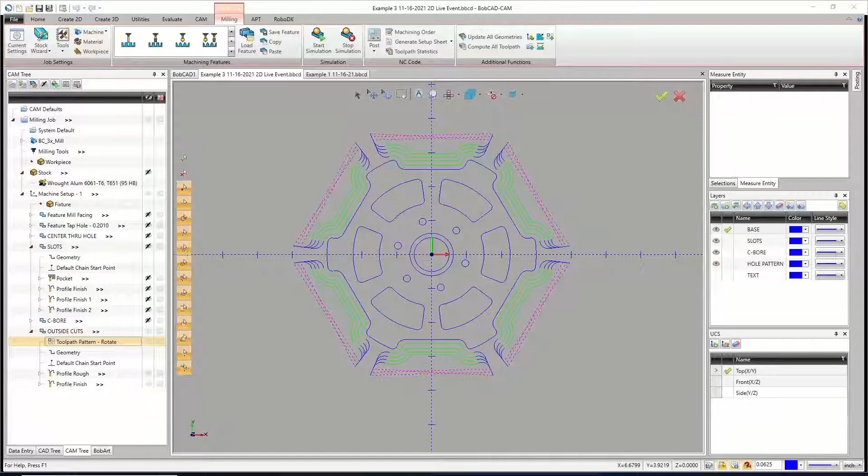Yes, perfect. All right, so right here is your part file. Now, I just want to show you my part file, and I want to point out one thing. When I have my stock on and I look at my origin, mine's top dead center. Yours is right over here, so that's what you'll see. Your machine setup is right there, which is totally fine.

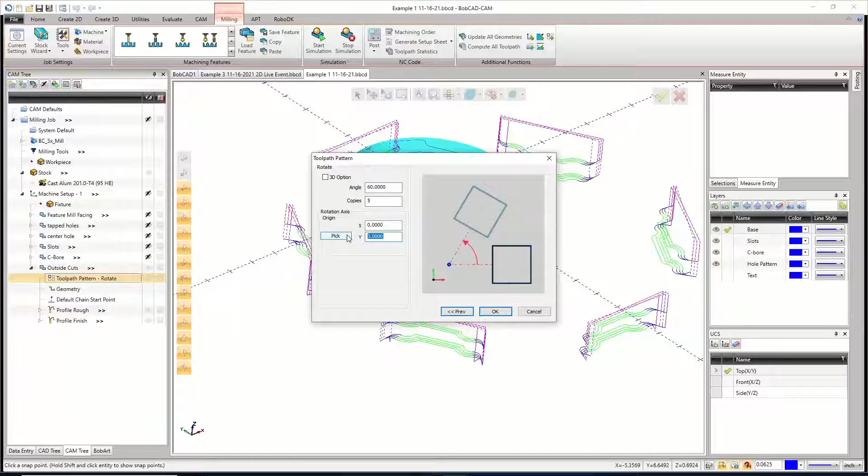The adjustment we have to make is on the toolpath pattern. When we're on here, mine is going off the origin of the part, and the origin for my part is the center of the part, so it's XYZ0. Yours, what we're going to do is just hover over this arc in the middle, then pick that center point. What you'll see is the difference: you have a Y that shifts your rotation center point up 3 inches to the center of the part. Then if I hit OK, it fixes it all. So that was the only difference, and that's totally fine.

That might be where you set your origin up. If that's not where you wanted to set your origin up, you'd have to go right-click on Machine Setup 1 and say Edit, and then pick this top dead center point here. Now, I'm going to do this. If you meant to do it, that's great. If not, we'll fix it here.

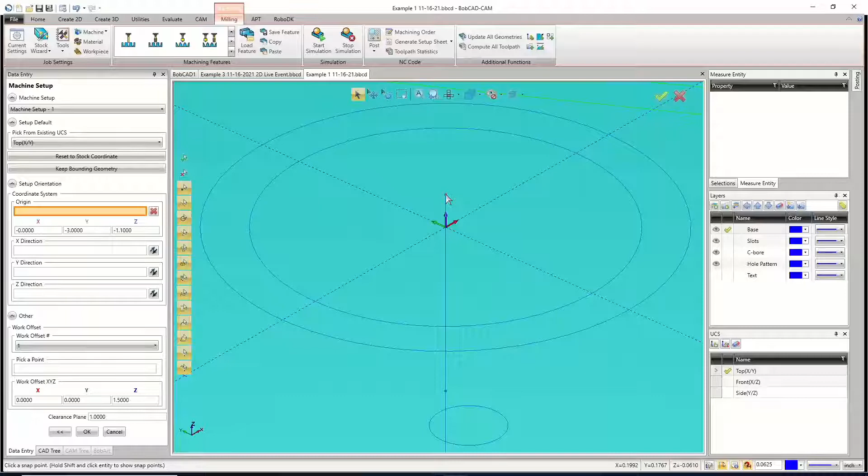Now, for everyone else who's seeing this, think of this as if you accidentally put your origin in the wrong place when you started and then you made all your tool paths, which happens. I've done it a bunch of times. Or it's one of those things you're thinking, I'm going to use the bottom left corner, and then when you get it set up on the machine, you realize it's easier to find a different corner, or whatever.

So if I move this, right now all of the toolpath that's in the part is in accordance to where the original origin was. So now that we've moved it, you'll see the toolpaths moved along with it. So what we have to do is right click on milling job and then do update all geometries. Then we're going to right click on milling job again and hit compute, and it should just recalculate all those bits of code.

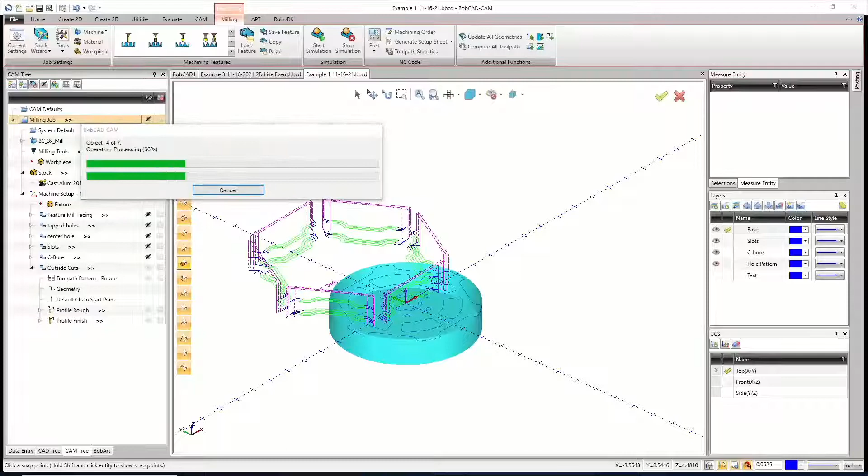And now, because we have our toolpath pattern, the toolpath pattern now has to relearn the position, or we just have to reset it. Right now, what's happening is it's rotating about a center point right out here, and from our one toolpath, it's just basically spinning around itself. So we just have to edit that toolpath pattern and just say pick.

Once again, just pick the center of your geometry. You don't have to worry about Z because it's the center of the geometry, it's for X and Y. So now I can hit OK, and that's going to set it up.

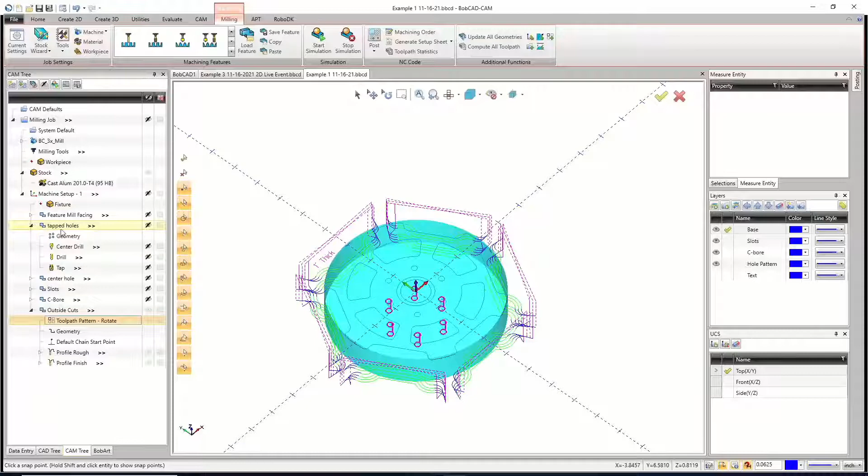Now, the next thing I always would say, if you do make this mistake, go in and check the holes afterwards. Open up, especially your tapped ones, open up your feature, because it likes to do this shift of the top of the part. And we went with Brock's copy — he had his origin on the bottom of the part, which is common if you're doing this on like a spoil board, where you'd be setting your part down and either vacuuming it down or clamping it down somehow, screwing it down, whatever. You'd go off the spoil board and then your heights are up from there.

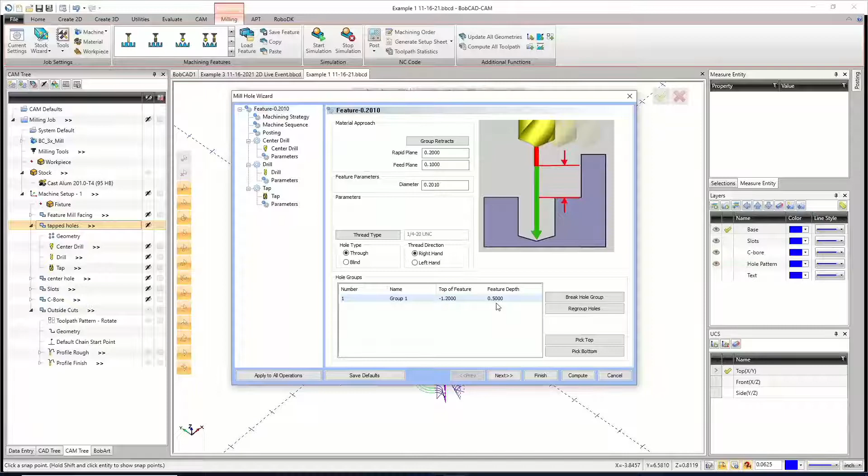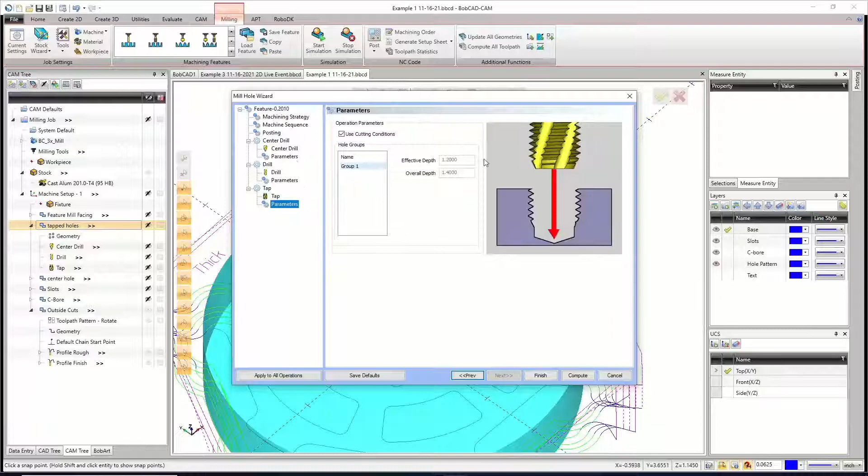So we'd have to go in and say, well, the top, we'd say pick top — and this always does this. Then pick just any edge that represents the top, and then right here we have to reset that depth, so we'll go 1.2, just like that. Then when you go back and look, your parameters should update for your drills and everything like that.

So now I can compute that. That's really the only one you'll have to worry about the depths on, and a lot of it comes from the fact that we're using wireframe geometry to define our holes. If we had a solid model and picked the inner surfaces of the solid model holes, then when we say reselect geometry, it reads the diameter and the depth from that, so the odds of it not making a mistake doing it that way are better.

But you'll always have to double check the holes, just because especially when the origin changes Z positions, it can act kind of weird. So there we go.

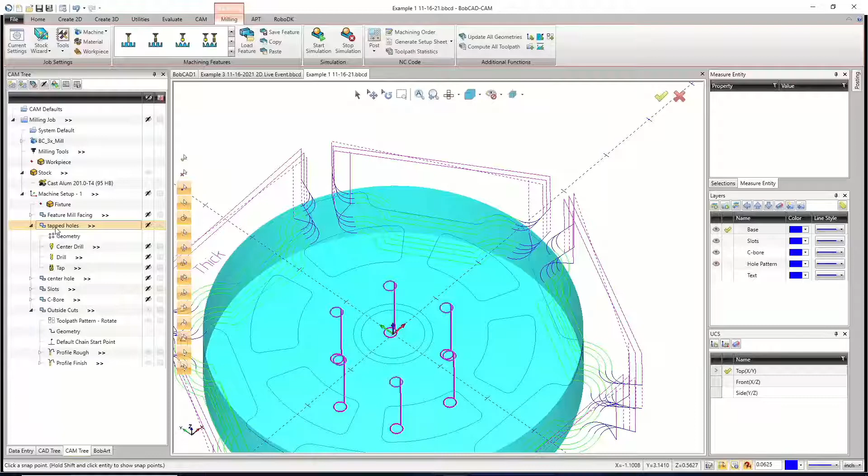All right, Brock, did you get all that? It was your origin was in a different spot. That's all it was. All right.

Awesome, all right, so Brock's got that. Now let me get rid of this. Just got to clean up the chat so I can see which one I'm on.

Sent you the file. Got it. All right, so got it.

So John, you asked, can you explain how to look at the views top, bottom, and apply dimensions to them? Yes, we could totally talk about that.

So let me grab this right here. All right, so I have my stock turned on. Let me hide all that stuff. Hide that. There we go.

So the top view is this view right here, it's just when you click this button. Now this is the top view of the top UCS. And the UCS is really what we're talking about if we were to try and dimension in different views. I'll show you an example of that.

So the top view dimensioning is really just whatever kind of dimensions you want to put on your part. I would usually do it - I mean, you're going to use the evaluate tab. And ever since they added this auto command, that's pretty much what I use.

So with dimensioning in a top view, which is your standard view, the difference is going to be: if I'm in a top view, I'm dimensioning the top, a top UCS. If I was to go to a front UCS, that's looking at the part from a front view. So we're going to go right here and view front.

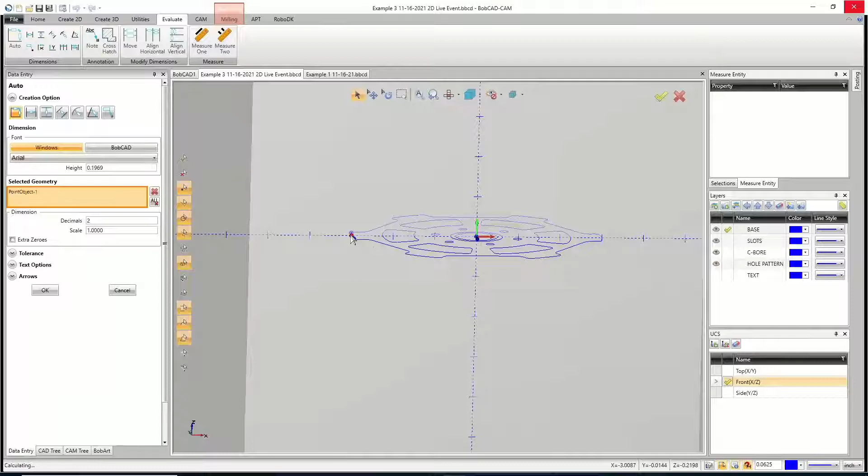So the front view is going to allow you to measure the diameter of our part from here over to here, and it's going to tell me that it's 6 inches. All right, now I'll hit OK and cancel.

And then I'll go back to a top view. So you'd be able to take your measurements based on whatever UCS you're in. So basically the UCS just rotates where you're drawing. For dimensioning, it just rotates where you're dimensioning.

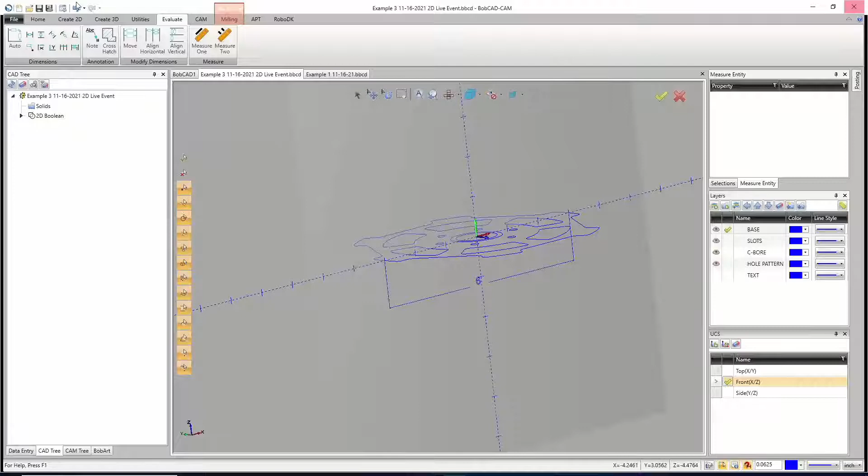In a part like this, you'd never dimension with that dimension. You dimension everything from the top plane. Basically you just want to align your X and Y axis with your part and then lay down dimensions.

For something like this, I would - a lot of this is arcs, so I can pick this arc out here, and it'll tell me what the radius is. So I could do that.

If I want to get the diameter, I could pick - let me clear out the geometry. If I wanted to get the diameter of that, I'd pick across those 2 points and get my diameter.

Any arcs, you just have to click on the arc, and it'll give you the radius from the center point to that arc. If you want it to show the diameter, you really would have to measure across it like I did with the 6 right there.

But fillets, you just click on the fillet. Again, I'm under just the auto dimension here. You just click on the fillet right there. You can see there's a decimal section - you could go out as many places as you want.

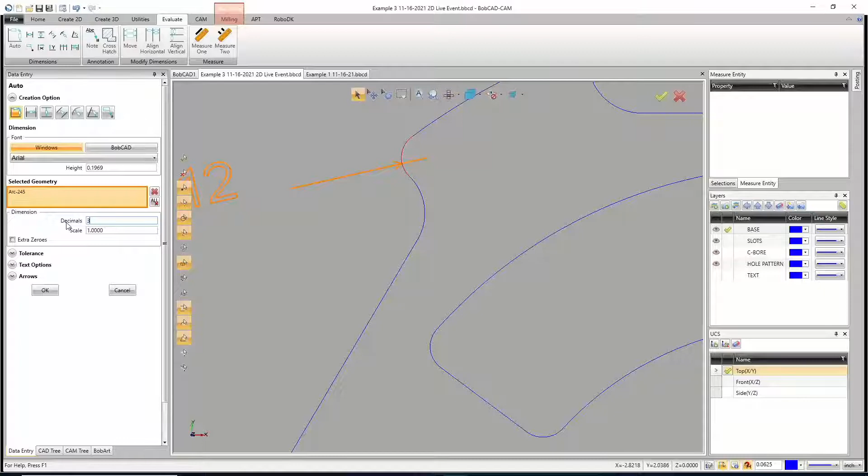For something like this, it's an 1/8 inch, so I would at least go 3 decimal places on there and then lay it down.

For holes, you just pick the hole and it will define the diameter of the hole. I'll go right there with that.

Same thing with holes - I don't really have any lines on here. Oh, I do - here, if you want to measure like a line, you could just click the full line and then drag it whichever direction you want to take the measurement for. So lines do have some play with them that you can do.

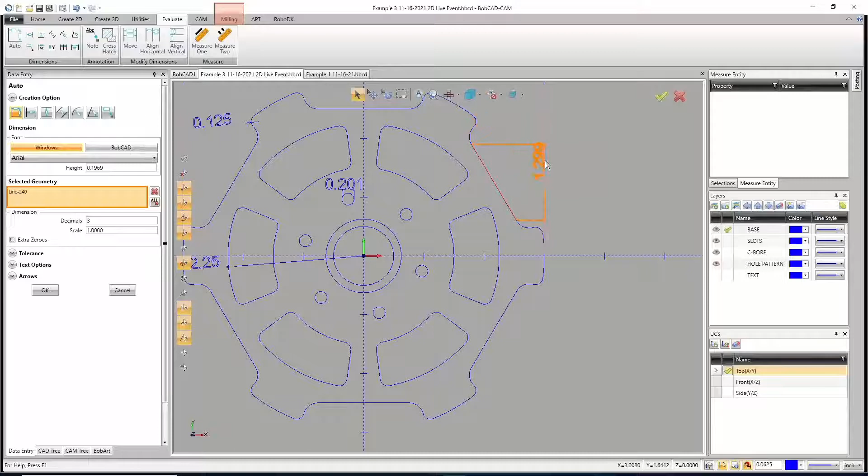You could even dimension points. So you're just really laying down dimensions.

BobCAD is not my first choice in making dimensions and doing like a print.

It's possible, but you really have to, like with SolidWorks, to make a drawing - you bring your solid model in, and then you take your solid model and you say, I want to make a drawing out of this, and it brings in the views.

You just say, I want a top, front, side, whatever, and it kind of does it automatically. For BobCAD, you'd have to draw that all out. The way I would do it would be with a solid model - I would copy and paste that solid model. I'd have to rotate it, and it's a bit more work. It's definitely doable, but it can be a lot of work.

So, did that answer your question, John? I could go maybe a little deeper. I just need to know where you want to be. All right, well, he's answering that.

So David sent me an email. He's got some parts he's working on. He doesn't have BobArt, which is unfortunate - it's a fun little program to use. And the parts are for a radiator grill spar from a 1934 Cadillac. I like it. All right, so I saved some pictures of it. Let me open these up.

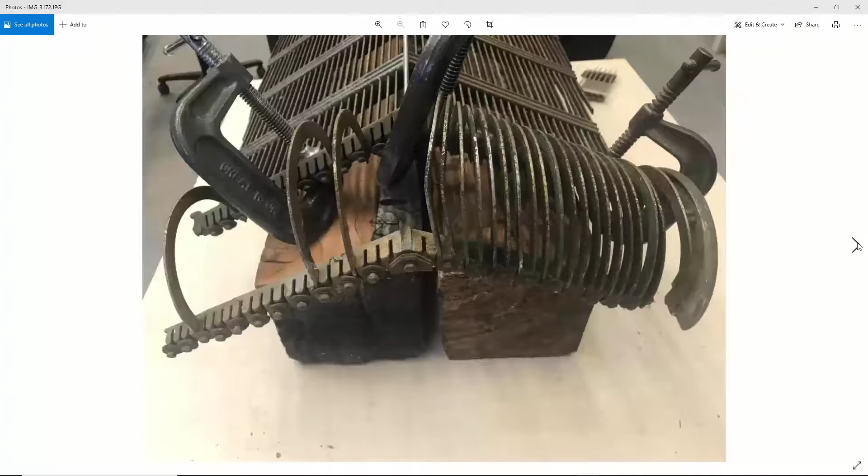Oh, here's the other pictures. You guys can see what it goes on. How do you go to the next picture? There we go, that's what it goes on. So they are all the same size, and so they're the ones down there. Okay, yeah, I mean, any of those ways would work. But...

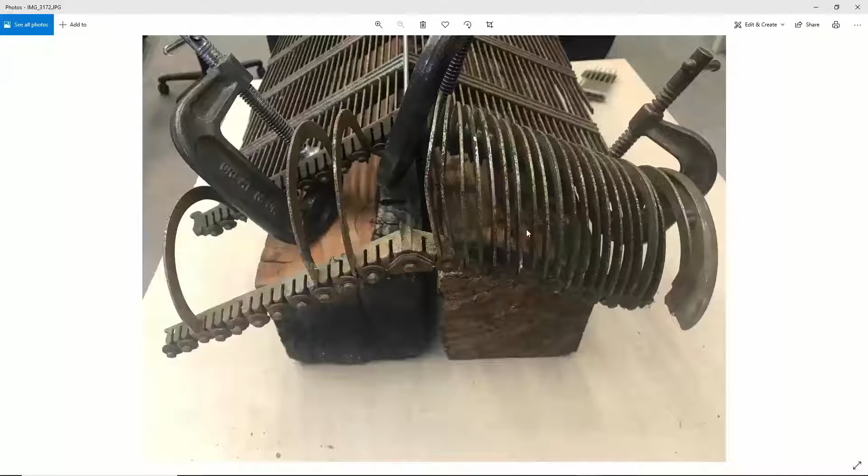Yeah, I mean, if we want to try it just to see if the BobArt idea would work - can you adjust the spline to adjust? Adjusting splines is, I think it's possible, but it's not super easy.

Let's see, so we'll make a smooth curve, as smooth as I'm getting right now. All right, so there it is, there's my spline. Now adjusting splines is a bit difficult because normally what you'd adjust with would be like the deform - or really the deform is what you'd get. I don't know, yeah, I guess you can adjust it, it just depends on where you click on it, and it affects kind of all the points around it, so it's not just affecting one point. It would affect kind of all the points around it. But yeah, you could definitely drag it and move things, so it's definitely something you could do.

You know, I would almost look at putting two of them together, because if there's two of them together and you could get a full oval, you could just do an ellipse. Like if two of those put together made an ellipse, you would measure the X, you'd measure the Y, and all you'd have to do is punch those in.

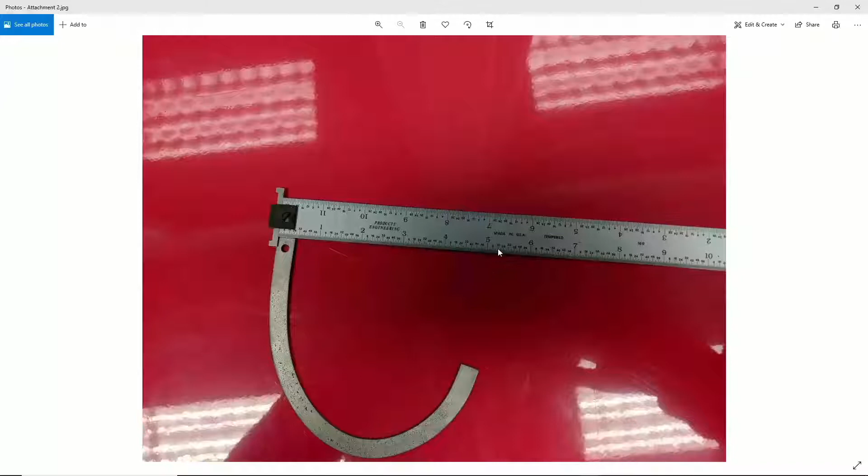So looking at the picture again, let me open this up. Looking at that, if that was to come around and keep sweeping, let's call it 5 and 16/64 ish - what's that break down to? 5 1/4. All right, so we'll go 5 1/4 on the - well, that would be our minor axis, so 5.25.

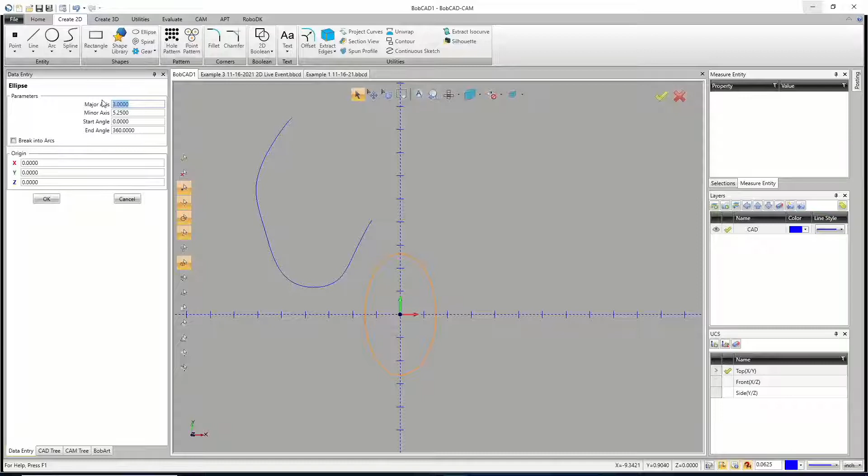And so that would be the minor, and then the major would be almost - yeah, if it looks like an oval, I would take a measurement of it straight across. Now, he said he did put the two together and it looks like an oval. I would do two straight across right now. If it's 10 inches or whatever, that would be kind of your oval right there. And that might work decently well.

And then from there, you could either break it into arcs, or when you create an ellipse, you create a spline. So, I mean, you'd have to figure out your break point, where you want to cut it. But other than that, you'd be able to go in and do your deform and modify it as needed.

Cool, yeah, that's probably how they made it. They probably made oval pieces and then cut them - they had a little thing, because you get, you know, two parts out of one oval. Or they just did it one at a time, I don't know.

All right, so back to here. Did I answer everyone's question? Let's see, all right, so David, I got you. Yeah, that should work, I mean it depends on your tolerances. John, I helped you, all right cool. So I think I got everyone. If you guys have any questions, feel free to throw them in.

This is a good one. All right, so did we finish this? Yes, we finished this whole thing. So I'm going to simulate it real quick. I think - did we simulate it at the end of the? I can't remember. I'm just kidding, I remember, we totally did it. All right, so we'll run through this pretty quick.

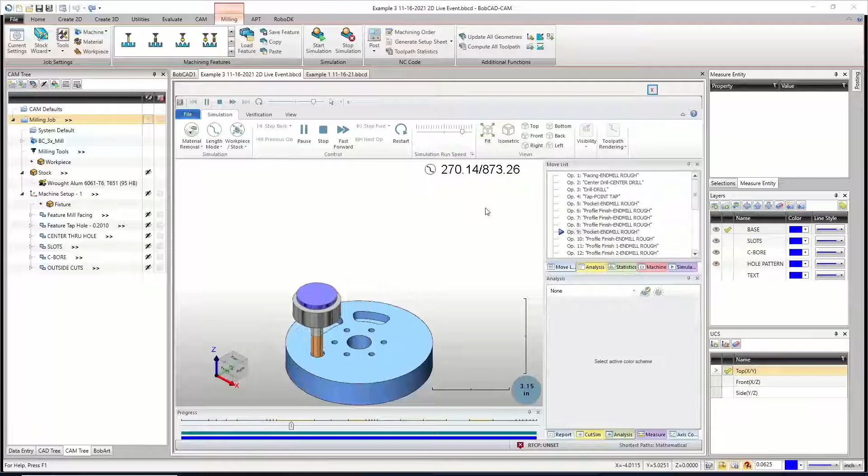All right. Part looks good. So now what I want to go and do is the pockets. I want to face it, I want to do the pockets, and I want to do the counterbore on the other side. So it's the same.

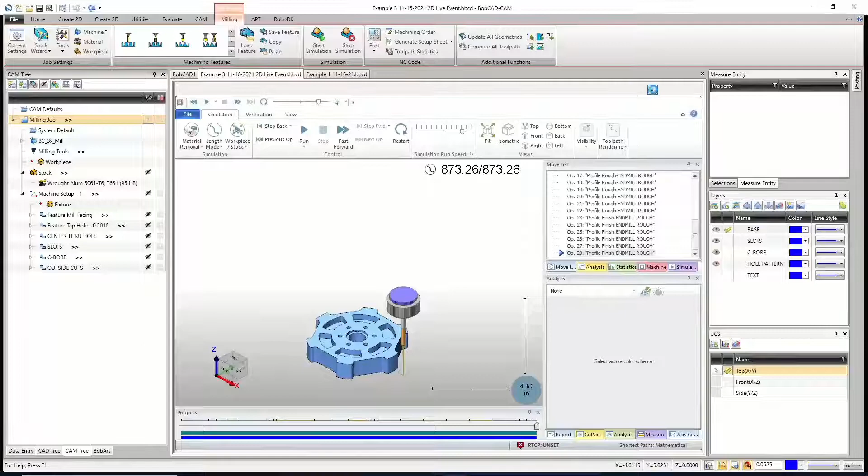I know a lot of guys struggle with this. It is kind of a goofy one, and we do have to be pretty accurate with this because the holes are not... yeah, the holes in the center. We need to make sure everything lines up. I guess we're not drilling the hole, so it shouldn't matter too much.

So the big thing to do here is, well, first we're going to add our new machine setup. We're going to add another machine setup to the job. And we're going to do that just by right-clicking on milling job here. Excuse me. And then we're going to go down to add setup.

1 second, guys. I got to take a drink.

All right. So we've added machine setup 2 in. And the big thing here is we're going to flip the part over. The stock that we have is already fine. We're going to use that same stock. We're going to copy and paste all the tool paths.

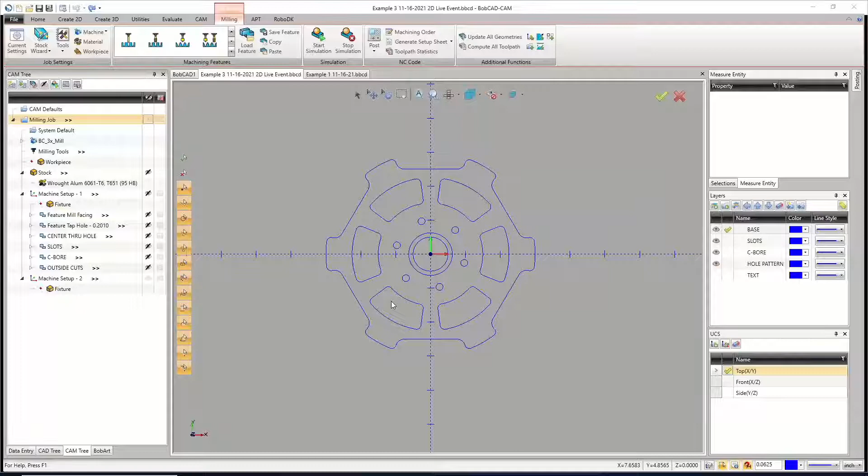But we have to make sure, especially if we needed to drill the holes in that specific location and everything, that when we flip our part over, we, at the machine later on, flip it the same way, especially with that hole pattern being off. Because if I rotate across the y-axis, the hole switches spots. So it's just knowing which way you did it. Really, it's not that important.

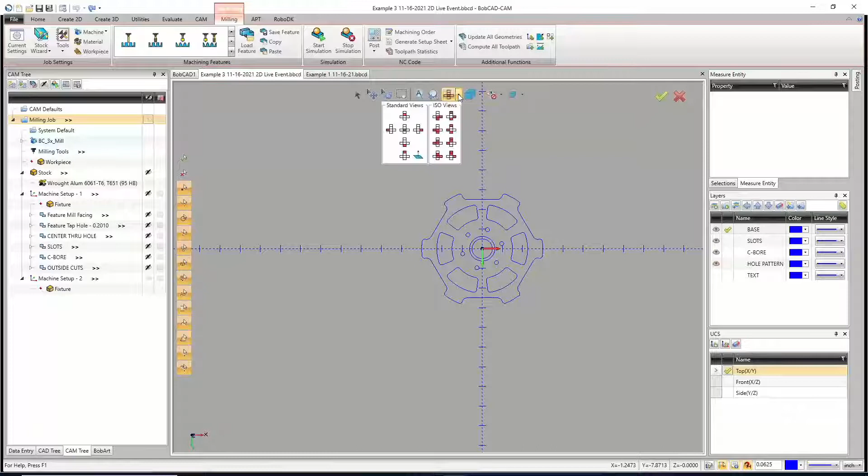For us right now, we're just going to grab it. I'm going to go over the x-axis, so I'm going to flip it this way. Or there's a bottom view on here. How does the bottom view do it? So yeah, we could basically just go to a bottom view, and that's going to be exactly what we want. So it's just click that drop down and then that button right there, or it's Control 4. So Control and the number 4 above your keyboard will give you that bottom view.

And then from there, I'm also going to tweak it a little bit so that it's like this. Remember, you can rotate just by clicking that middle mouse wheel in. You do not have to use the buttons up top. Just click your middle mouse wheel like a button, hold it down, and move your mouse. It'll save you a lot of time.

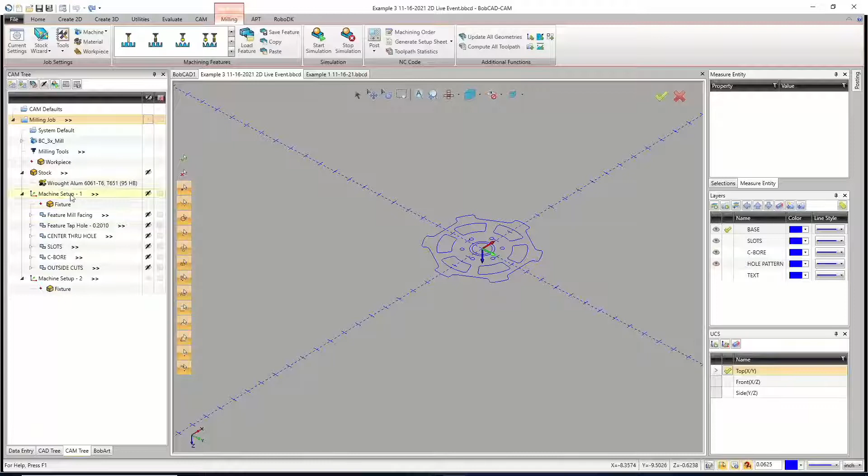So I'm basically setting up the stock, doing the machine setup again. So we're going to try it. Or we're going to do it. This isn't a try. This is easy. All right. So we've defined machine setup 1. We now have to define machine setup 2.

And without having a solid model and without moving any of our geometry, we need to make sure that we set this all up correctly. Our copy and pastes and our faces and stuff might not read correctly. So we're going to go in here and say rename. Actually, it should, because we defined the bottom geometry as the face. I didn't mean to say rename. We're going to go to edit in here. Sorry about that. Right there.

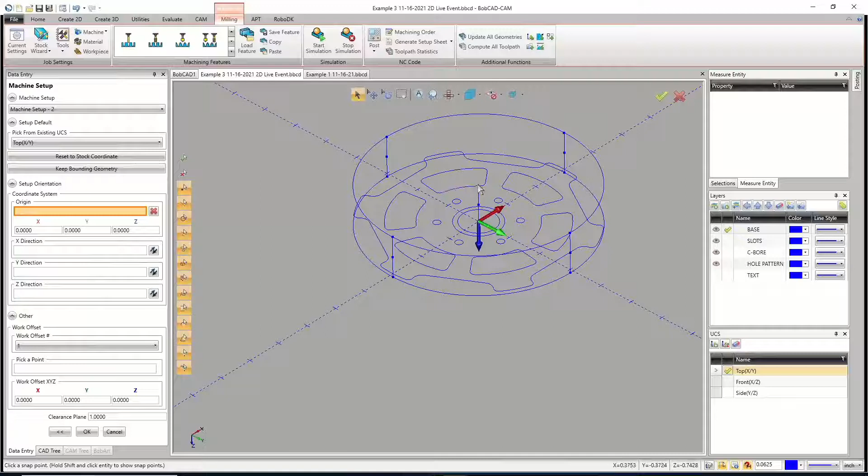And we're just going to pick the origin as this bottom point right here, the top dead center in there. You can pick whatever point you want. Just remember, there's certain things that rely on knowing where that point is. One of them being the toolpath pattern, which we don't really have to add right now unless we wanted to do that to the pocket.

But the next thing we need to do is that Z, that blue arrow, always needs to be facing away from your geometry that you're trying to cut. The direction it's pointing in, you're always cutting opposite that, because that's kind of the floor and you're going into it. So we need to fix X or Y. Now, right now, X looks like it's pointing in the right direction.

So I want to go right over here to the Y direction box, and these buttons on the end are just to flip the origin. So I'm going to flip that button right there with the Y, and then I'm going to flip the button for the X. Or if I did that the other way, if I had just flipped my X, same thing. We got to flip it either way. So X and then Y, or Y and then X doesn't seem to give you a different result. They both need to be flipped.

But don't pay attention to the Z. Only pay attention to the X and Y. We have to follow the right-hand rule in BobCAD. So what that means is we can never violate that. So if you get X and Y in the right locations, pointing the right way, Z has to follow that.

There's no other way for it to, we can't do a left-hand rule. So there it is. So now we'll go ahead and set up. If you wanted to change work offsets, you could. It wouldn't be a bad idea. If you had specific jaws made for this, and they're taking into account now that the part is 100 thousandths smaller, you could go in and let's say work offset number 2. So that'll be a G55.

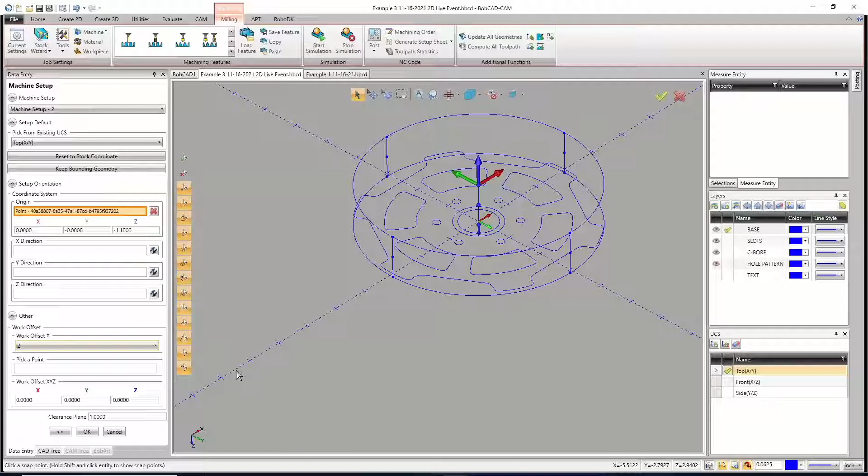So if I was doing a bunch of these parts, or maybe 2 at a time even, maybe I started on one vise, I flip it over and shove it in another vise, and now I'm running 2 ops or 2 parts at the same time, a rough on the top side and a finish on the bottom side, and I'm just switching because we're going to use all the same tools, so it wouldn't be a bad idea to do that. The only other change I'm going to make is add a Z value into my work offset. Again, that's just for my simulation. That does not affect the code. So there you go. Clearance plane's fine.

We'll hit OK. Now, with this one, because when we defined the stock, we added the end face and the start face, it should know how much geometry we have. I was thinking it might look at it based on where it touches geometry from our origin. All we got to remember is we added 100 thousandths. We know where the top of the part is, and we know how we're going to run it. So you could either copy the feature, which is going to have the depth and everything.

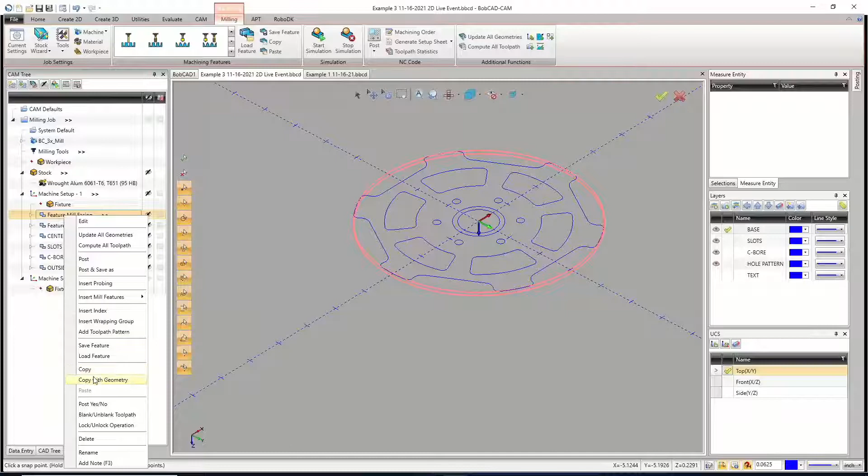So we'll say copy. In V34, you also have copy with geometry. And this is helpful if the geometry stays the same. So I'm going to just say copy. With facing, it doesn't really matter because it automatically finds it. So I'm going to go ahead and paste it there. Now, this is something new to version 34, and if you guys didn't know it, now you'll know it.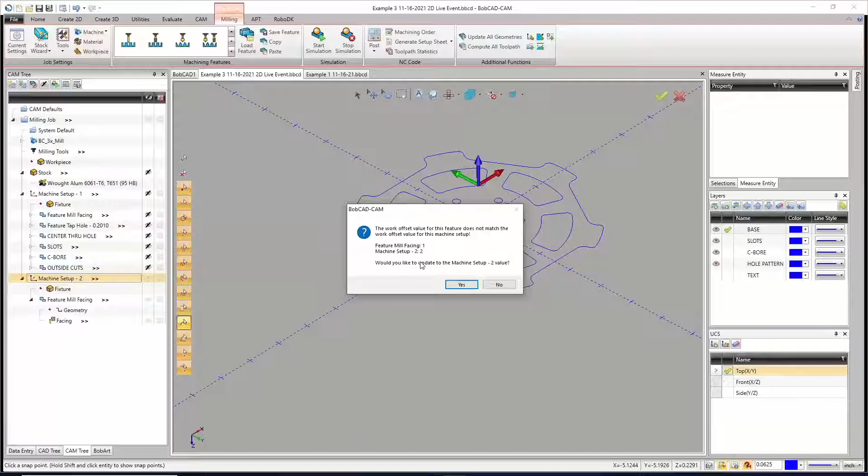In the past, version 33 and back, if you copied a feature from machine setup 1 into machine setup 2, and machine setup 2 has G55 or work offset 2 running, the feature that you pasted would always stay as its original work offset. Now it can change that. It'll automatically change that if you want it to. So would you like to update machine setup 2? So basically we want to update the facing feature to match machine setup 2. So we'll go ahead and hit OK.

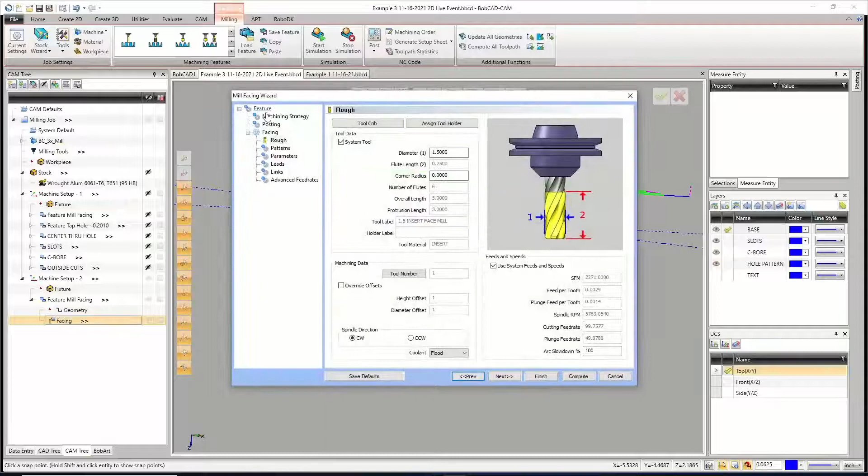We'll just say yes. And then if we right click on the facing and hit edit to double check that it worked, on the posting page of this now pasted toolpath, it's set to number 2. So that's how we got it. So now I can hit compute, and there it is. It looks pretty good. We want to look at the feature page here. Top of feature is at 0, which is perfect, and the total depth is 100 thousandths. So it is recognizing it based on what you set up as the origin or the extra stock that you have on there.

All right, sorry about that. My throat keeps drying out.

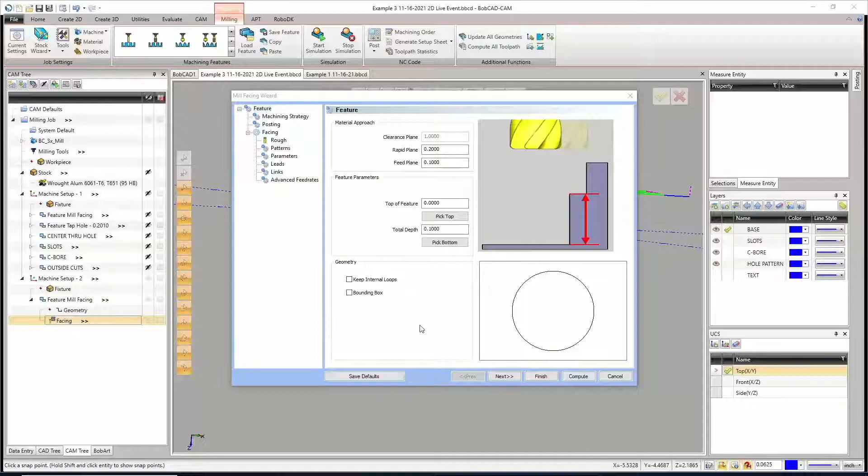All right, so we will compute. It's already there, and there we have it. So then I'll shrink that up and blank it out. Now we want to do our counterbore pocket. So we're going to copy the, actually we'll do the slots first. That's the order we did it before. So we'll copy the slots. And we should be able to copy with geometry because from top side to bottom side, as long as everything's located properly, they should line up.

So we will copy those. And then I'm going to paste them. We should be able to do copy with geometry. Let's try it. Let's see if everything lines up. So we'll say copy with geometry. Or if you have version 33, just copy it.

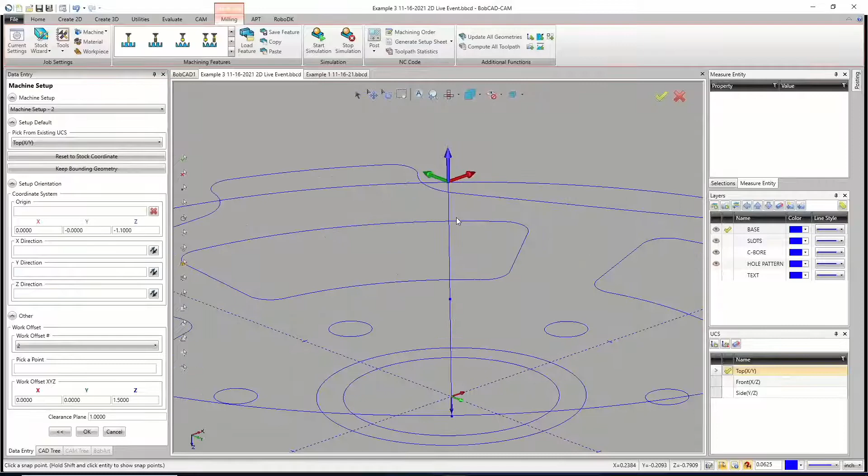What if you left these on the bottom of setup 2? So you're saying, instead of having the one on the top and this one floating up above the part, it's sitting down there at 0, Rick? I would edit machine setup 2. So right click on machine setup 2 and just go to the top, say edit. All those points should pop back up. Are you saying you did it unintentionally or you meant to do that? Because that could be different.

You meant to? Then you would have to locate XY on this side of the part and then drop it down to where that Z0 would be. Or if it's locked in from, well, machine setup 1 would have been on top of the part.

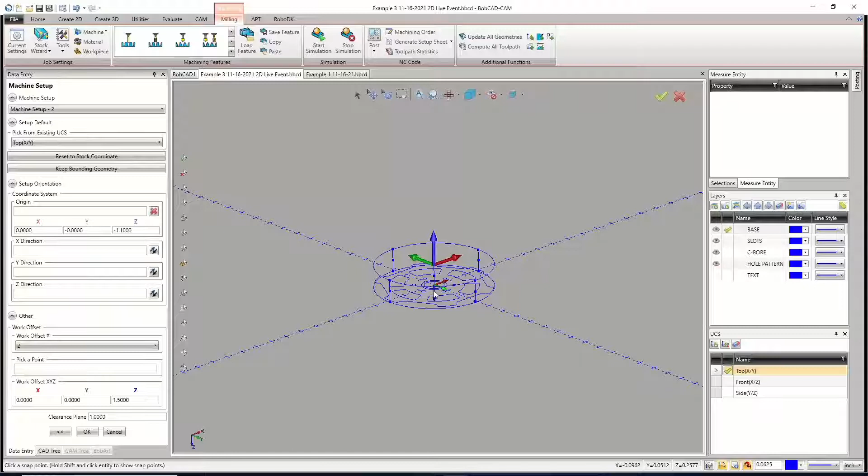Well, then, okay, so on your facing, let's see. You'll have different numbers than me. For me, I have 0. And you should have, if you're at the bottom of the part, you'd be up 1.1 inches. So your top of feature for your face would end up being a top of feature at 1.1 inches.

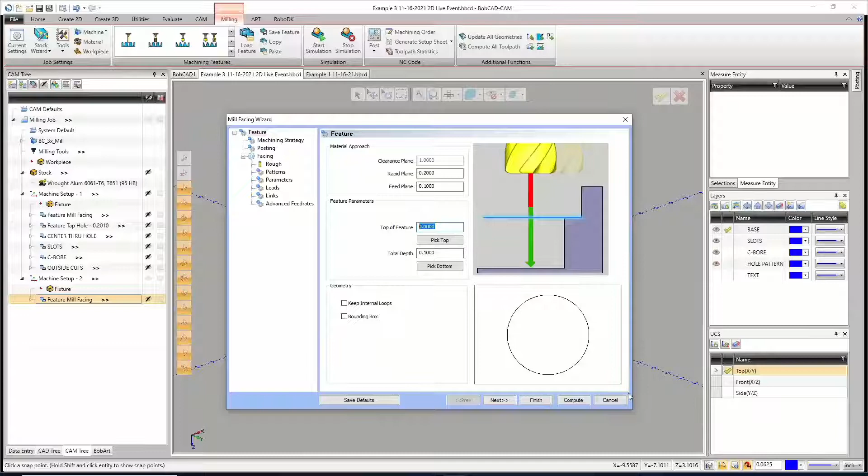And then your total depth would be 0.1 because you're going from that center point at the bottom, you'd be going up 1.1 inches to the top of the part and then taking off your depth of 0.1. And then when you compute that, that should show your face in the right location. Let me know if that is what you meant. I think I got it.

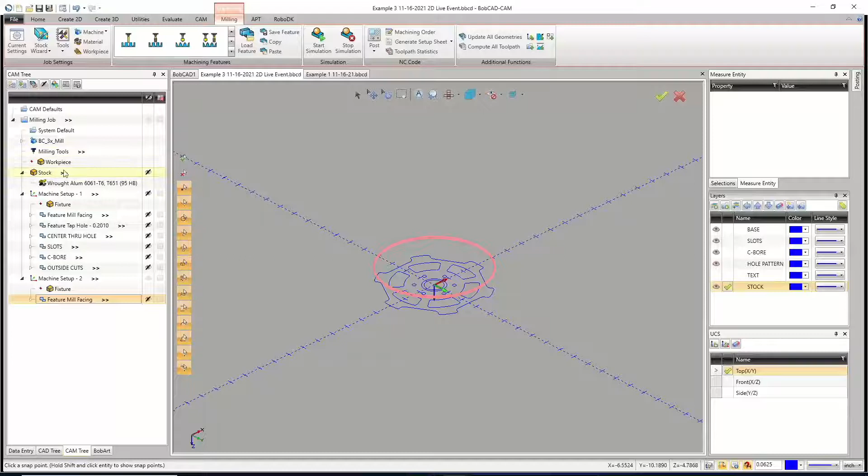Without having a solid model with this, it does get a little bit more difficult. But a quick little button that you guys can learn about real fast, and it pays to know it at least, is the stock when you're inside the stock. So what I'm going to do is over here in my layers, I'm going to add a new layer and call it stock. So if I go over to my stock in the CAM tree now, and I right click and go to the stock wizard, or actually, I don't even have to go there. Sorry. We're going to right click on the machine setup 1 and just say edit.

There is an option in here called keep bounding geometry. And what it does is it grabs the wireframe that BobCAD created and it adds it to the part. So I could go in and say keep bounding geometry, cancel out of that. We didn't change anything. And then on that layer, I now have that bounding geometry.

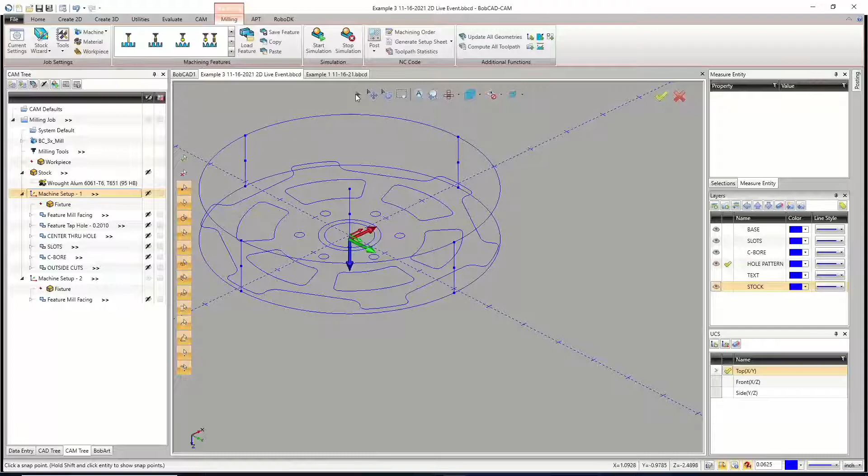Why is my other stuff disappearing? I don't know how that happened. Something got moved. All right, no big deal. Let's make sure this is good. This is good. That's good. And then the base should be all the rest of that. Huh. That's really weird. It grabbed my base somehow, but that's a way to keep it.

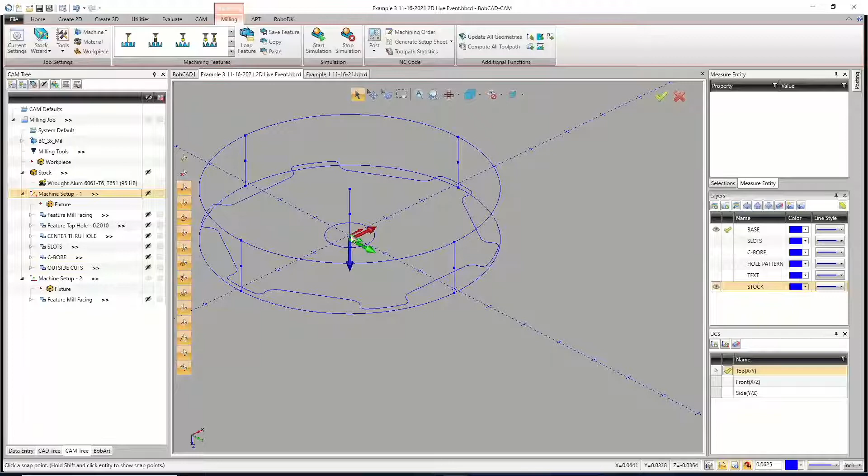So now what you'd be able to do, because your origin is at the bottom of that part, you'd be able to go inside your feature right here and say pick top, and then you'd pick that point right there, and then you'd tell it the depth you wanted to go. So definitely doable. Just depends on how you set your origin up. But really, how you set your origin up is very important. But there's many ways to do it. You could really set it up off whatever you want. Wherever you can locate, you could pretty much mimic that in BobCAD and locate off of it.

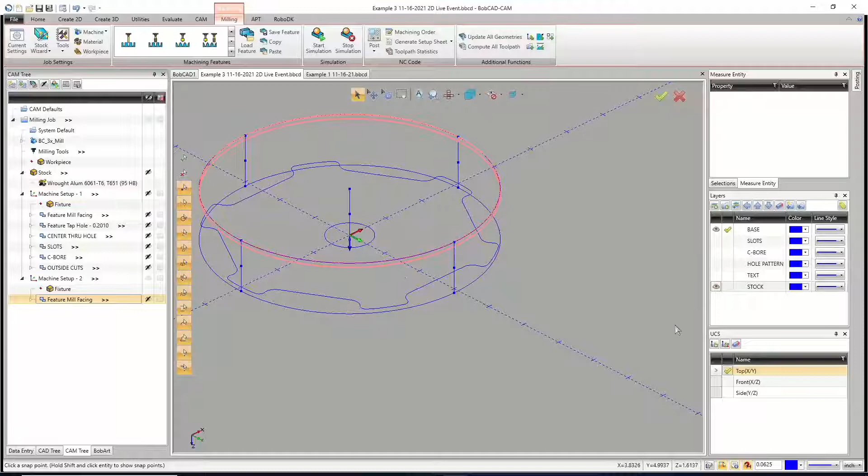So let me pick this thing. Am I in a feature or something? What's going on? There we go. All right, so let me just move this back to my current layer. Then I can hide that stock. There we go. All right, so we have our facing on there. Yep, right there. And then we will now do these slots. So let's do this one.

We're going to right click on the slot, say copy with geometry. I just said this a minute ago, I cut myself off in this one. If you're using version 33, just copy it and then paste it. And I'll go ahead and paste the feature. And then, well, I'm going to update all my work offsets, but what you're going to do if you have 33 is right click on the word geometry. There should be a little red plus sign because you guys don't have a copy with geometry.

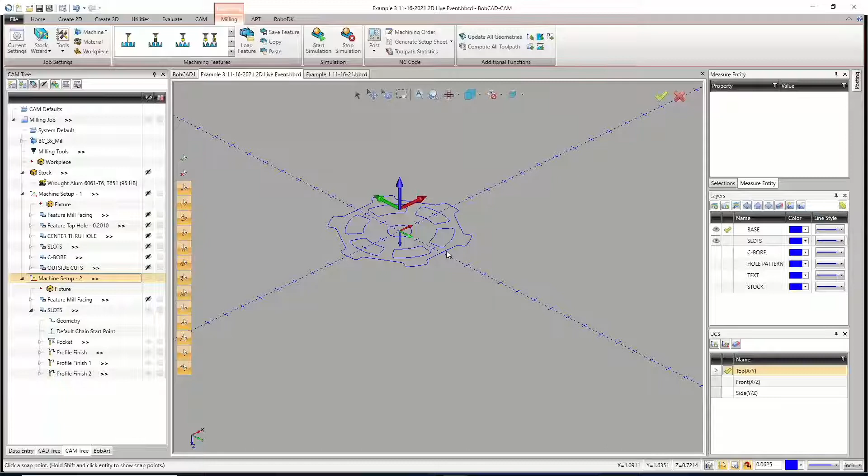So you'll right click on geometry, say reselect, and then hold shift and pick all 6 of your pockets. And then when you're done, let's go look at this. We'll say edit. We're at minus 0.1 for our top of feature and 0.375, exact same cuts on this side. And we'll go ahead and compute that one.

And there we have it. There's our slots for that side. Man, it stinks not having a solid model for this. If someone wants to do the solid model, anyone give me a yes. When we finish this, we'll draw out the solid model real quick. I'm going to do it anyway, just to show you guys how easy it is, really. It really won't be too bad.

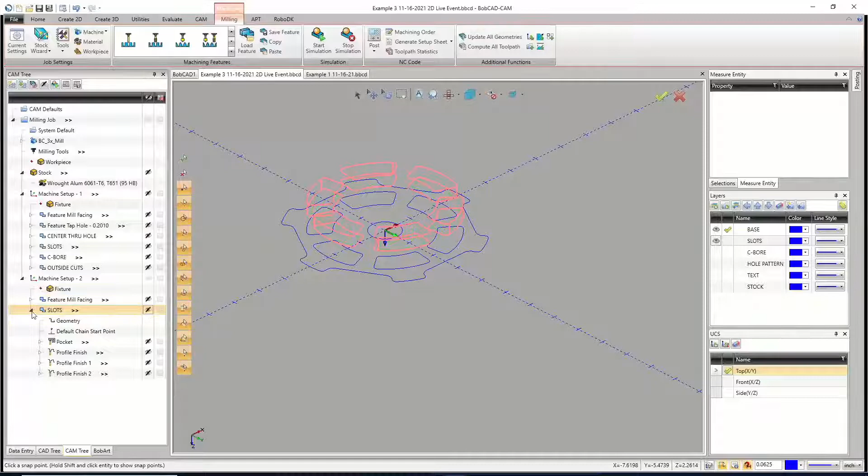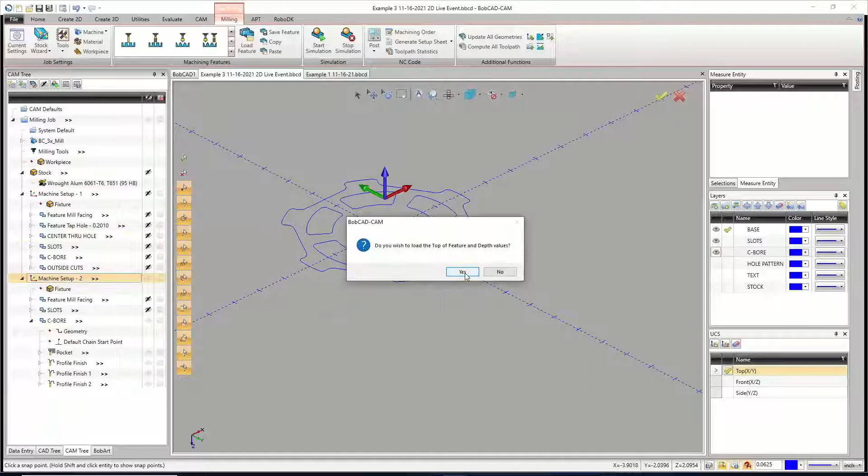All right, so we're just going to blank out the slots, shrink it up. The next thing we're going to do is the counterbore, which I have right there. So the counterbore, the C bore there, we're going to copy that guy. Again, we could do it with geometry, or I'm just going to do it like we do it in 33 or 30. Copy it, paste it under machine setup 2. Do you wish to use the same top and depth? No, I'm going to pick it this time.

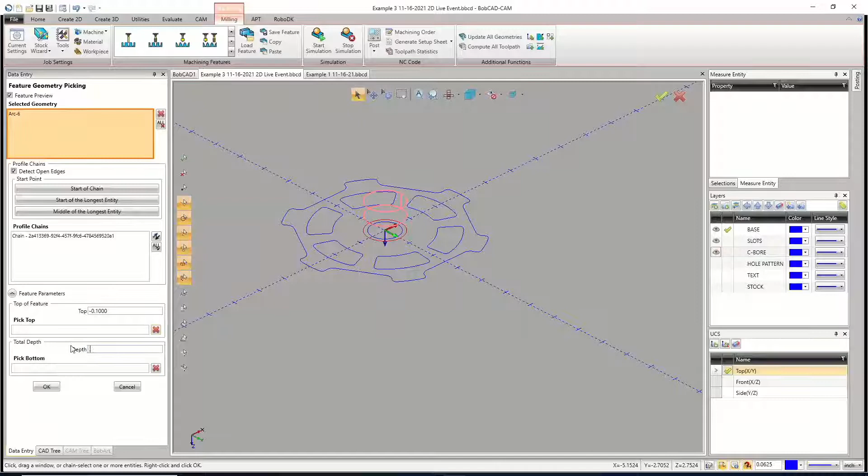I'll do it myself. So right here, we'd right click on geometry, say reselect, and we're just going to pick that counterbore feature once again. Right now, what it's doing is it's not accounting for the faced off material, and we have no geometry to pick that. So we have to remember to do our minus 0.1. And then we could tell it the total depth, which was 1/8 of an inch, so 0.125. Then we'll hit OK and compute that thing once again. And there it is.

Perfect. I'm trying to think here. Yeah, that should do it. I was thinking if there was a cool way to show some stuff off, but never mind.

All right, ignore that. So let's go ahead and give that a save. I haven't saved in a while at least. We'll go ahead and shrink that up. Looking at everything that we have on the part, we got the slots. Yeah, that should be everything. So if you run your simulation at this point, it will flip the part over for you. So we should see the whole thing run and get the results of what the entire job is going to run like. So we'll start it right there.

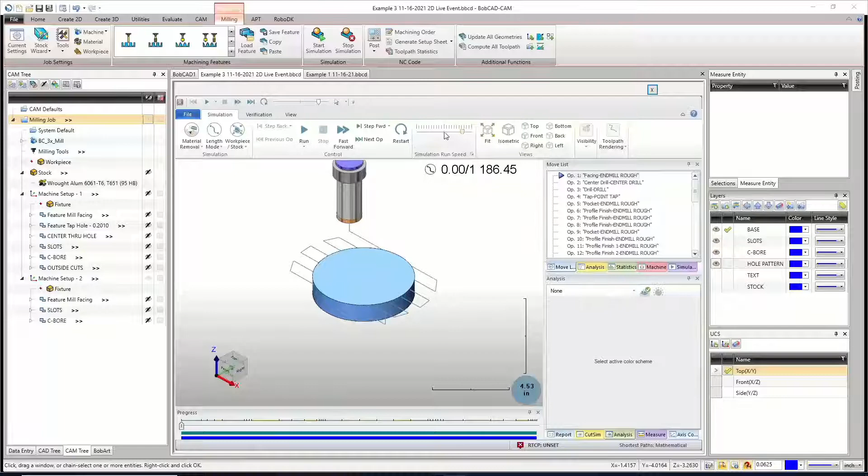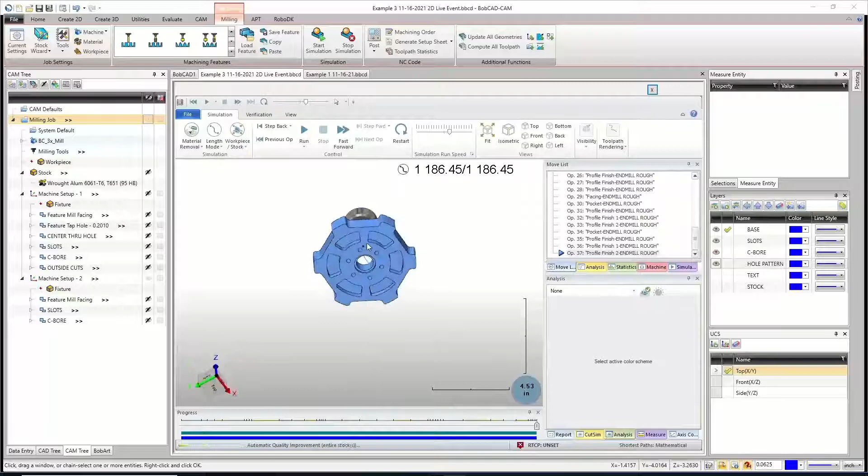All right, so face off top, center drill, tap, open up that center hole, make our pockets, outsides, and then we're going to flip it over, face it off, make our other pockets, and make our counterbore. So now we have the entire part done. Everything lines up. Looks pretty good. Again, there's still the work holding we have to deal with that I didn't go into, but that's what makes you guys a machinist, right? So let me go ahead and close out of this now.

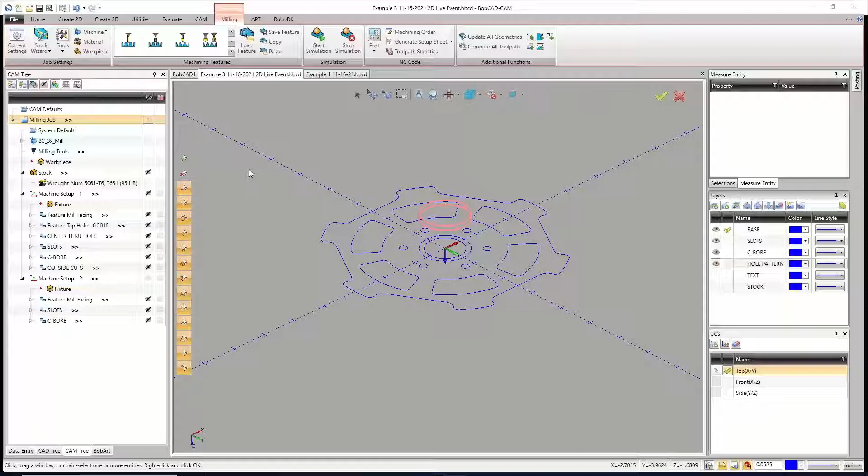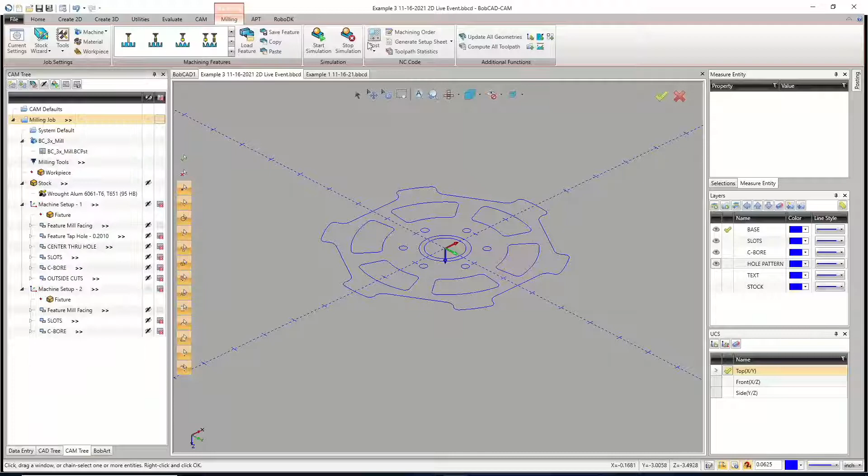So how would you go and post this out? This is totally up to you how you do it, and it depends on your post as well. The first thing you want to do is make sure you have the right post processor. I'm going to do a post yes/no on the entire jobs for now, just to show how it works with just the facing toolpaths, because they're short and quick. So I'm just going to post my code by right-clicking on milling job, or you can go up here and hit post. Don't matter how you get there, just get there.

So right here, we'll see we have machine setup 1, G54, machine setup 2 down here, G55. The way this post handles it is it puts an M00, an optional stop in the machine for me to flip the part over, which is one way of doing it. Another way could be what I mentioned a few minutes ago. Maybe we run just machine setup 1 on a single part. We'd post the code out. This is all the code for machine setup 1. We cut that part, take that part out, put it in another vise, and then we would run both of them.

At the machine, we would locate G54 off of the first vise we used, and then we would use G55 on the other vise. And you'd post it all out, in which case you'd want to get rid of that M00, way down in there. Another way of doing it is you might cut all the tops and then flip it over and cut all the bottoms. That's another way of doing it.

For me, that would just be a post yes/no, starting with machine setup 1. You'd post it, right click in here and do your save as. We could call this top, or I'm just going to go op 1, and then say save. Then you would turn that one off, turn machine setup 2 back on, post the code, and do a save as on that one, and we'll just say op 2, save. So now you have 2 sets of code that you could bring out, and that really depends on how it's doing it.

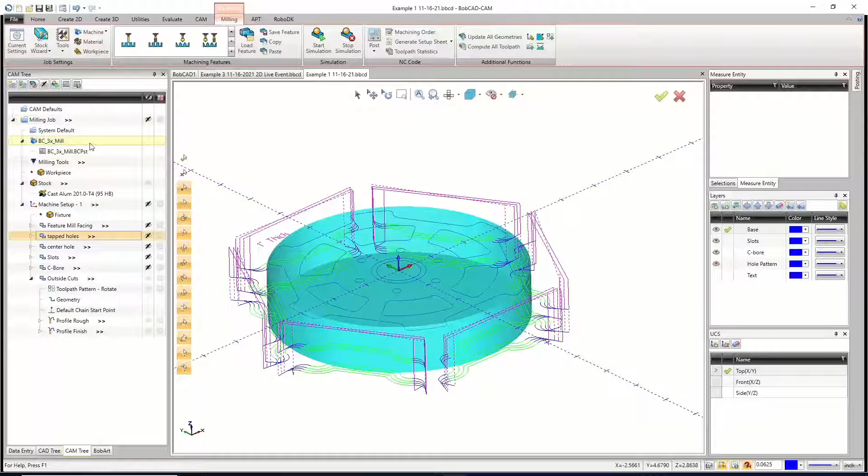Did you ever delete any posts? Do this: in your CAM tree, right-click on the post that's just below the BC_3x_Mill. Right-click on that and say Edit. A box should pop up. You're going to hit Select. And it should open to this folder, but if it doesn't, I'll walk you through where the folder is.

You're going to go to your C drive here on the left, then to BobCAD-CAM data, and then whatever version you're using, version 33, 34, 32, whatever you got, open up that folder. In that folder, you'll then see one called Posts. We're going to open that one up. In that folder, you'll see the machine type, so we're going to go with mill, and then pick one of the posts out of here, like repick the BC_3x_Mill, and then hit OK, and then try and post again.

If that doesn't work, I've had it happen before where you just won't post. Save your work, close BobCAD, open it back up, and try and post. Sometimes it's simple as just restarting the program. Usually happens to me if I let my computer go to sleep.

Like when I go to lunch and my computer falls asleep, that's usually what I get. But try those out. If it's still not posting, if it's specifically this part that's not posting, then I'm not sure. All your options might be set to post yes, no.

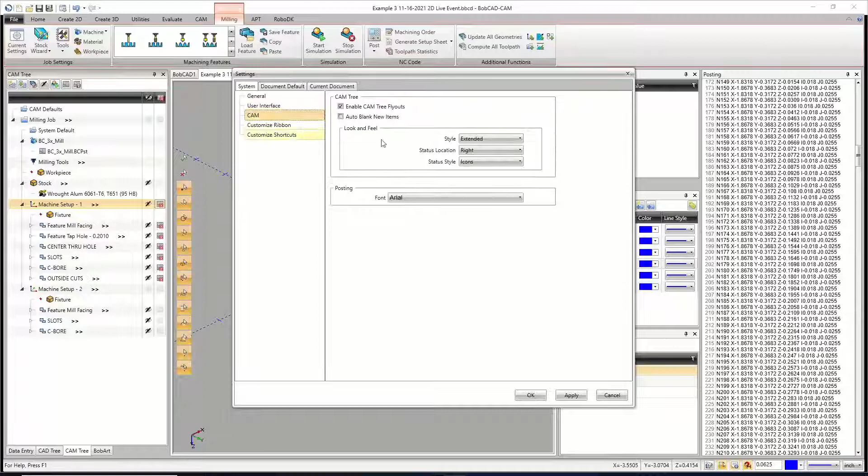If these little things are lit up right here, or let me go to the classic view, CAM classic, apply, okay. The classic view would be these little icons right here. So next to your features, if you have that little controller with the X on it, that means they're post yes, no. You have to right click and do a post yes, no, just to turn them all back on. And then again, when you post, it should come up.

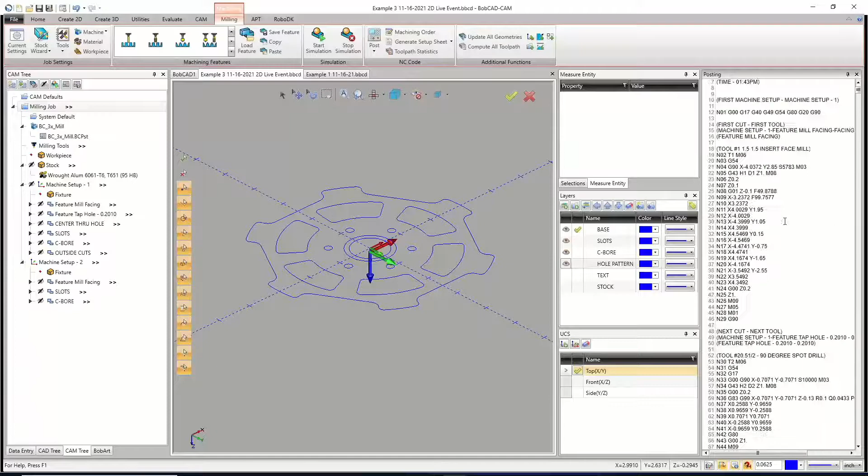If that doesn't fix it, we'll probably have to look at it, see what's going on, or get in touch with tech support, because that shouldn't happen. Because even on yours that you sent me, other than the changes I made, it's there. So it's either a bad connection with the post or something else. All right, so those are all the different ways you'd be able to post that one.

Now what I want to do, and it'll be pretty quick, is I want to make the solid for this. I figure I'm not going to wait. Let's put this all into one thing. It's still 2-axis cutting, it's just a little more 3D geometry, but you guys will see how much easier it could potentially be to make this part.

So the first thing I want to do is make a layer and call it solid. But I also want to make another layer, and I'm going to call this layer bottom. This is just going to be the geometry that has to cut through the bottom.

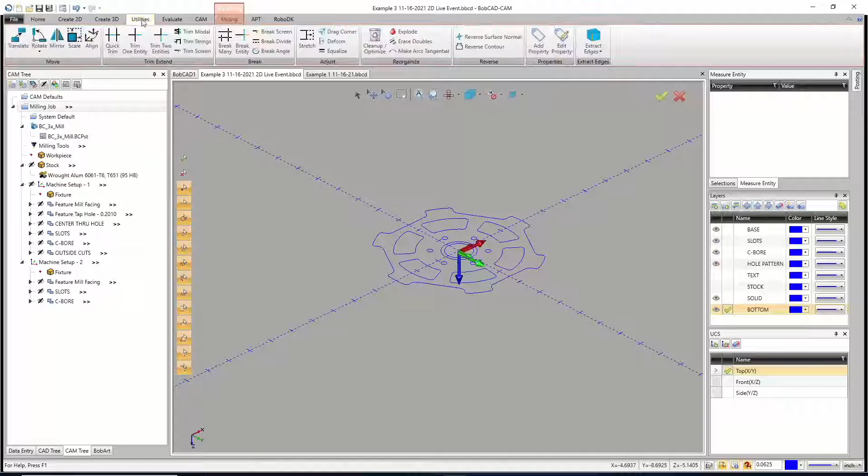And so the way I'm going to set this up for the bottom pieces of geometry is with a translate. I'm going to go to Utilities and Translate. You got to think of it from the view we're working in. I'm going to go to my isometric view here, like so. So this is the top of the part. So from here, we're going to go down 1 inch. So all we're going to do is grab all of this geometry right here.

Grab it, that one, that one, that one, and that one. And then we're going to drop it down in Z. We'll just say -1. Make sure that you turn on the copies button. That's the most important thing here. And then we can hit OK and cancel out.

So now what we're going to do is turn off the layers that we don't need. Now, even with a translate, the geometry that you translate does go to the bottom layer. I just didn't want it in the same places where I'm working. So we're going to turn off everything that doesn't go all the way through the part.

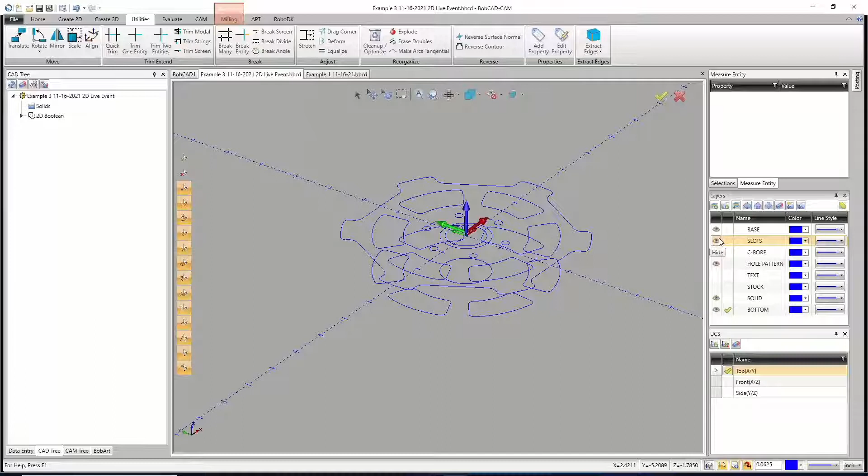So for this one, it'll just be the slots and the counter bore. All of that is going to just get extruded to 1 inch.

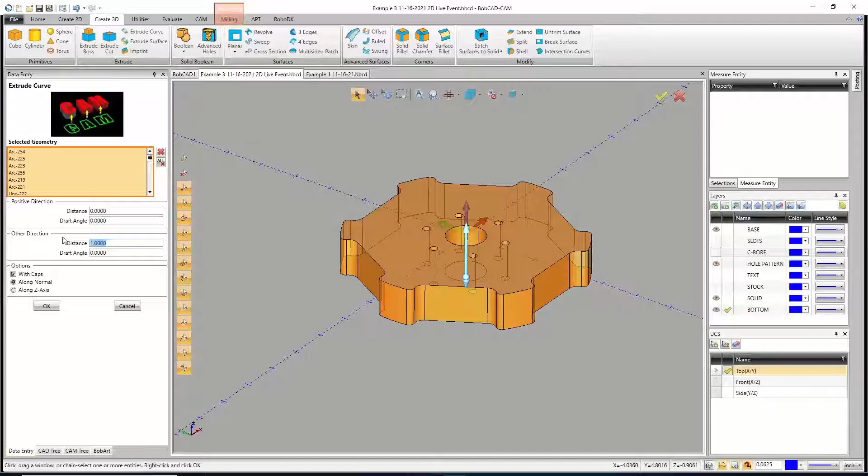So we'll go up to Create 3D. We'll do an extrude curve, and we're just going to drag a box over all of our geometry. Now, by default, it goes up 1 inch, that's just where it sets it up. But if we put a 0 in for the distance going up and hit Tab or click in another box, BobCAD will always enter a 1 into the other box. So if we 0 this one out, the 1 goes back to the top. So I want to 0 that out. There's my 1 inch down. I'll then hit OK and cancel out.

So that has all the holes in it that we need it to have. So now we could turn our other layers back on. There's our slots, there's our counter bore. Now, if we flip this part over, we'll see that because we translated the stuff down, it also pops up on there when we do that.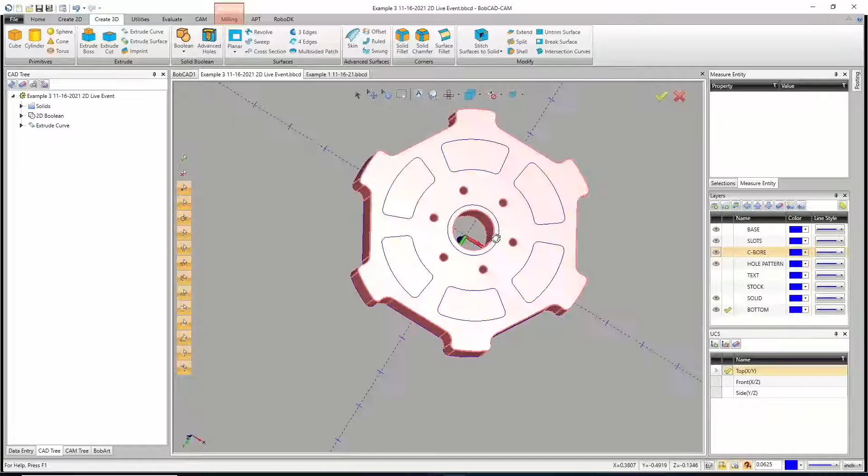So now we're going to go in and just pick the top slots and cut them in 3/8 of an inch. So we'll go ahead and just say extrude cut. I'm going to click in the window.

So this is big. For shortcuts to work, and you guys might run into this sometimes when you try and change just something as simple as your view, if the drawing window isn't your active, kind of the last click you made, some shortcuts don't work. So you need to make sure to just left click in this window and then hit the letter S on your keyboard, and that'll hide the shaded surfaces. That allows you to then kind of get in there and grab that geometry. Because if that surface is there, BobCAD finds that surface. If you hide the surface, it grabs that line.

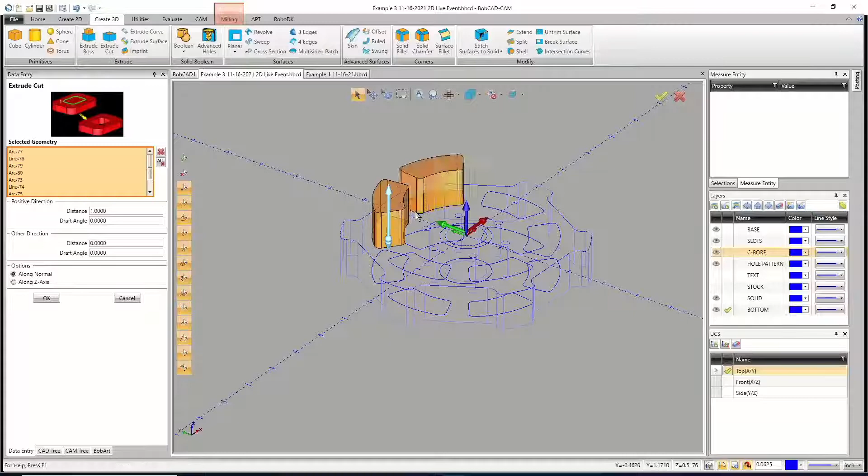So I'm just going to hold shift and pick all of these right here. Now, the distance that it's going up, I grabbed 2 of the wrong ones, didn't I? Yes, I did. That's the thing I was worried about doing. There we go, there and there. Did I do it with more than one? Yeah, I totally did, did it with a bunch of them. All right, so there we go. So notice that it's going up 1 inch right now.

We need it to go down 3/8 of an inch. But if we think about this now, we also need to do the same thing on the other side. But for the numbers here in BobCAD, they're going to be opposite. So the distance going up right now is irrelevant, it doesn't touch another solid model, it doesn't even touch the solid model we have. So it doesn't hurt anything if you do leave it up. So what I do when I'm doing a part like this where I got to go 3/8 deep is I set both the distances to 3/8. So now we're going up 0.375 and we're cutting into the part 0.375. Now, why is that important? Because when we do these bottom shapes, that 0.375 isn't going to be going down, it's going to be going up. So it just saves us a second.

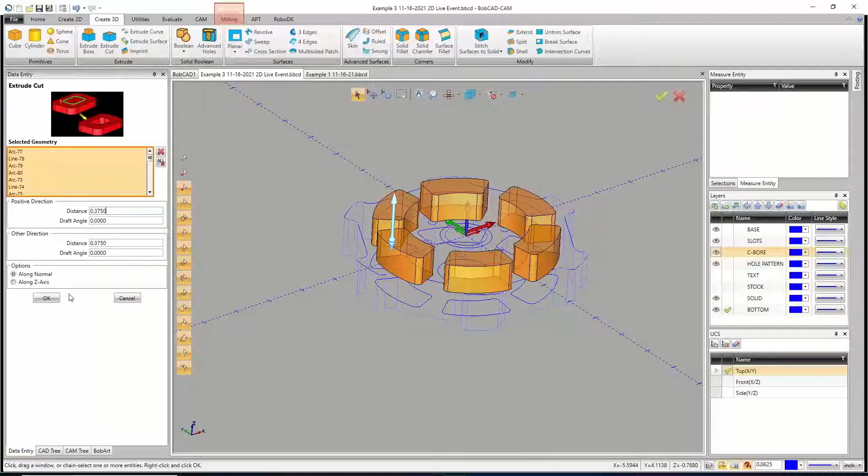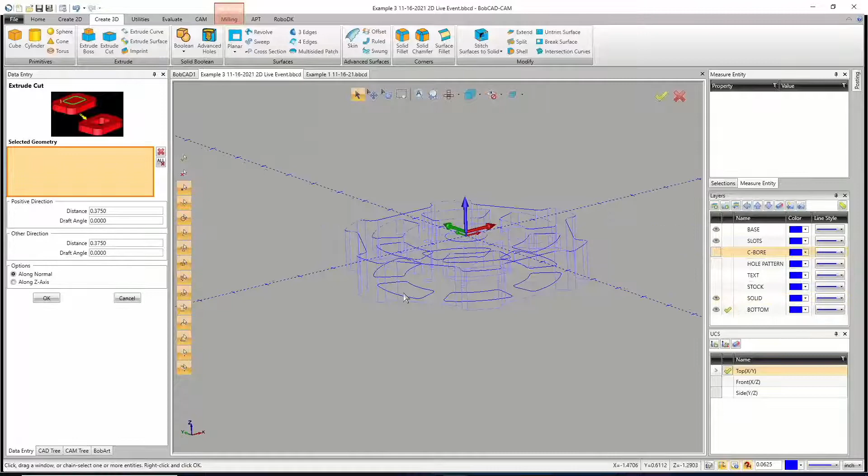So go ahead and hit OK. And then if you want to hit the letter S on the keyboard again, click in here and hit the letter S, there's the first set of cutouts. Then I'm going to make sure to pick the bottom ones this time, which I can actually hide the geometry for and drag a... I can't drag a box. Never mind, I can't drag a box. I'm just going to hold shift and pick all these, just try to make sure I get the right ones. Putting them on a different layer wouldn't be a bad idea. We'll go ahead and hit OK, cancel out. And now when we hit the letter S once again to turn it back on, we got those pockets getting cut in on both sides.

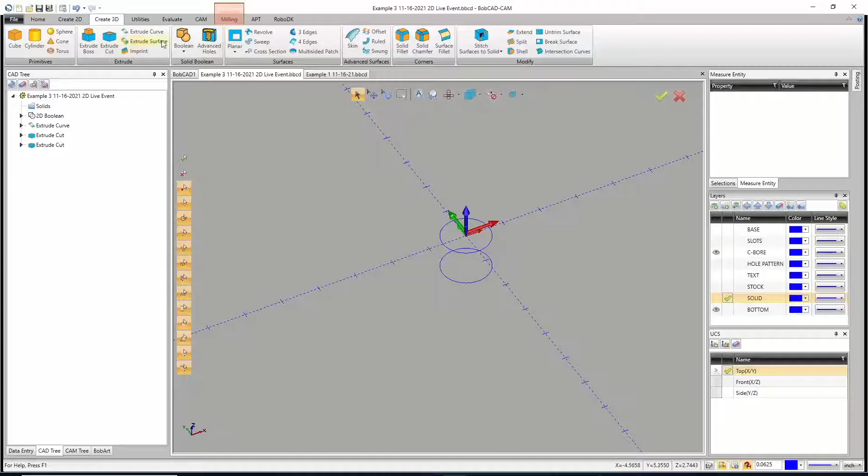And then finally, the last bit is just using the counter bore. And I would hide the slots, I would hide the base, and honestly I would hide the bottom. But I've been putting my whole solid on the bottom, so I need to go to my select mode. I'm going to grab it, pick the solid and then put my check mark on it. And I just want to use that modify to current layer, that way I can hide the solid. All right, so the last counter bore we have to do to make this thing a solid model is we're going to go ahead and do another extrude cut. The distance up is going to be 1/8 of an inch.

The distance down is going to be 1/8 of an inch. That way I don't have to change those numbers again later on. And even with the layer hidden, just so you guys are aware, BobCAD doesn't care that the solid is on the layer. It cares about the fact that that solid we're creating right now will intersect with that solid even though it's on another layer.

If you wanted to add these two things together instead of subtracting, you'd do something like an extrude boss. We're going to subtract it, which is just an extrusion with a Boolean. So with our solid layer turned off, I'm just going to hit OK, pick the other piece of geometry, and hit OK. Now, like I said, even though it's on a hidden layer, it does still affect the part. So you can see there is the fully drawn part.

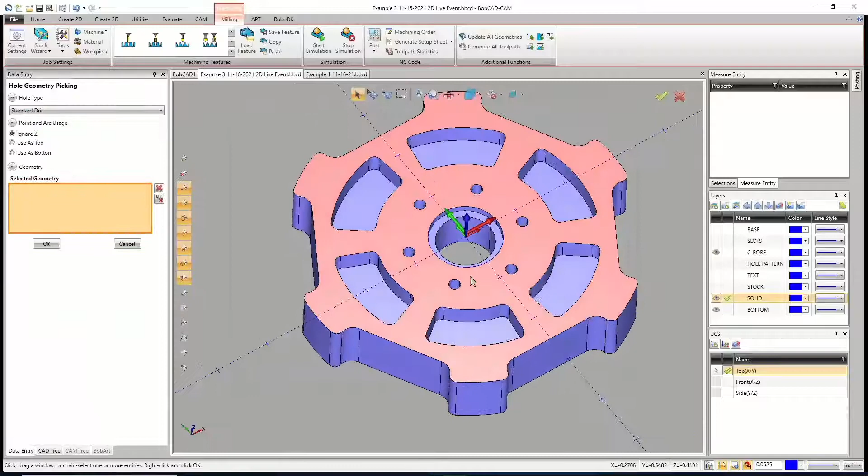Now, why would you ever go about doing this, especially after you've programmed the entire part? You wouldn't. You would do this before you started programming, and it would make programming easier, because now when I go to do my holes, I'll do it as a new feature. I'll just go to my mill tap hole. Now when I go to do my holes, instead of picking just arcs, I can go and pick the surfaces, just like so, and hit OK. And then right there, it knows the diameter, it knows the depth. When we go to the next page, it knows where the top of feature is.

Now, we would still have to account for the fact that there's the 100 thousandths on the other side, like we talked about when we did this, but I didn't have to think about any of that. Having a solid model saves a lot of time.

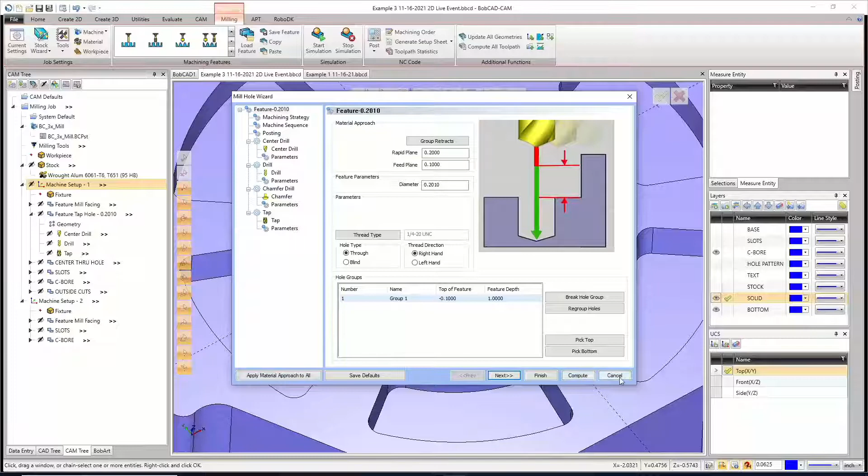Because one thing we could do now that we have a solid for like the pockets, the slots that we have, I can remove all the geometry and I could go and just pick the floors. I say, I want to machine all that right there. Knows the top, knows the depth, has all that figured out. I hit OK. We're going to get the exact same result here. But it's done, and all I had to do was click on some pockets.

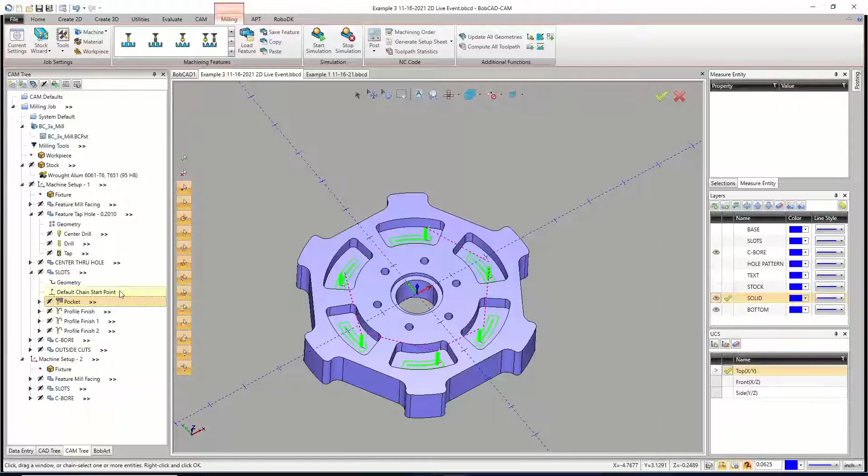Where it really gets good is copy and pasting, because you can go in and just pick it. There's also, let me see if I have it. Let me grab the C-bore here. Or actually, which one? We did the center through hole. The center through hole we used the high-speed adaptive on. All right, so I know it's got an advanced pocket attached to it. So I'm going to copy that one, and I'm just going to go ahead and paste it.

And now what I'm going to do with this, I want to use the same top, and no, I don't actually. So this is going to be the C-bore. Once again, let me rename this guy. So the geometry for this, I can go in and use this feature.

It's called Detect Open Edges. So this is, if you guys have ever done open pocketing in the past, the way that you do open pocketing in BobCAD in the past was to use a dotted line. So if there was an area on your part that the tool was allowed to leave on, you would use a dotted line. But with this one, it reads these 2 chains.

Let me get my top of part and my total depth, just like that, and I'll hit OK. Now I can compute that tool path, and we'll see what it comes out looking like. I'm pretty sure this should work.

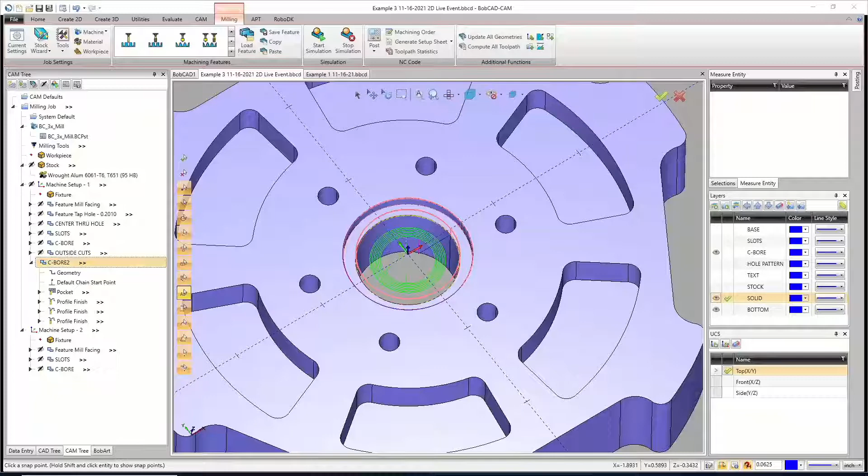And there it is, so you have your pocket. Let me blank this and go back to my normal cam tree - I hate not having these buttons anymore. User interface, cam, classic, extended, right icons. Apply. Okay, so now I could blank this out and look at, there is my pocket for that.

And we'll just recompute that real quick. We probably won't notice too much of a time savings here, but if we look, this counter bore is going to take 8.9 seconds and 8.7 seconds. It's not much when we're going - how fast are we moving right now? Let's see, so the pocket's going, let's say this is going 50 inches a minute. This will be a little bit better for us - we'll say 25 there. So the pocket's going to go 50 and 25.

Apply. Yeah, okay, all right, so that's more like it. It's still only about a second.

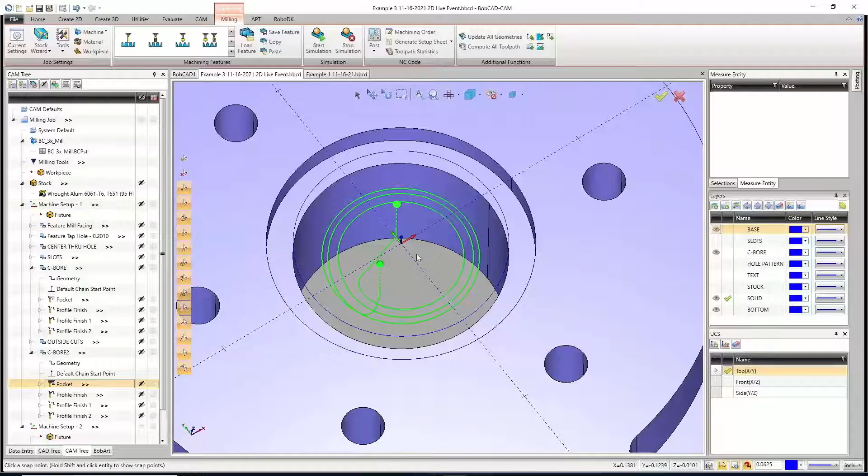It'd be the base actually - we'd have to take that arc right there and make it a dotted line, and then it would know. In the past, if you're using version 33, that's how you'll have to do it, that's how it knows that you're doing the open pocket. So detect open edges, it's a killer feature. You just pick the surfaces, but it all relies on you having those surfaces.

But with that, you'd also be able to skip a lot of this stuff, like the feature tap hole that we did - all in one. I could go in and do hole recognition. And not only could I do hole recognition, but when I created those holes, the way I should have created those holes was I should have used the advanced holes option, because then you can apply attributes to the hole. So the hole itself would be, when BobCAD reads it, knows that it is a threaded 1/4-20 hole. So there's a lot you could do with that.